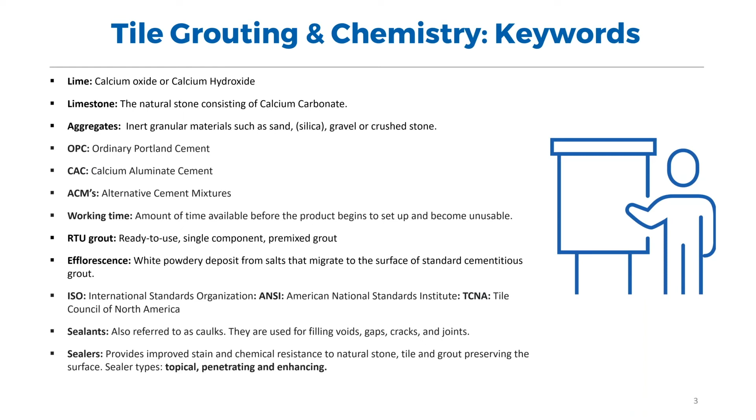So it's that degradation or decomposition of calcium carbonate that creates CaO, which is calcium oxide, and carbon dioxide. Not the best thing in the world there, but we'll talk more about that.

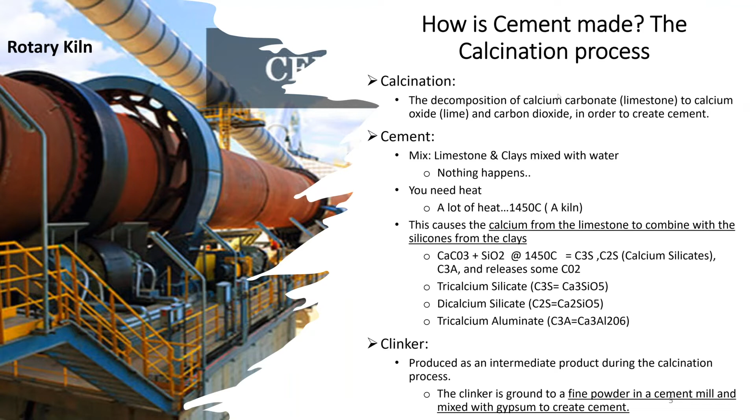The next screen shows you the 8 key raw materials in cement manufacturing. The key ones to discuss here are pretty much lime and silica. They're obviously the largest contributors from a percent composition, and we saw that in the clinker breakdown I gave you before. Alumina is also an important raw material in the formulation. We'll take a closer look at each one, but there's a total of 8 actual materials in there.

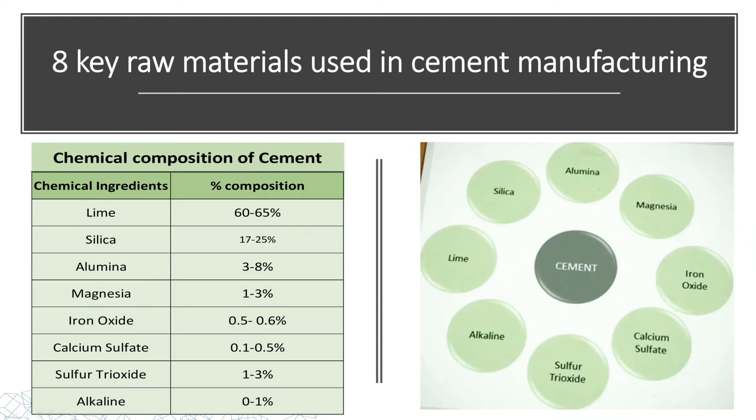Functions of some of these key raw materials, just sticking with the key ones here: lime is actually used in that formulation to form the silicates and aluminum calcium. It's very important to get the right quantity of lime. If you get too little, it reduces strength. If you get too much, it can compromise integrity. So there's an issue with getting just the right balance of lime into the kiln.

In part, strength comes from the silica. The alumina gives quick setting properties—when we talk about alternative cement mixtures with calcium aluminate, you'll see that alumina connection from a chemistry standpoint. Magnesia will reduce cement strength if added in excess, so we have to be careful about that. And the sulfates simply slow down or retard the set time.

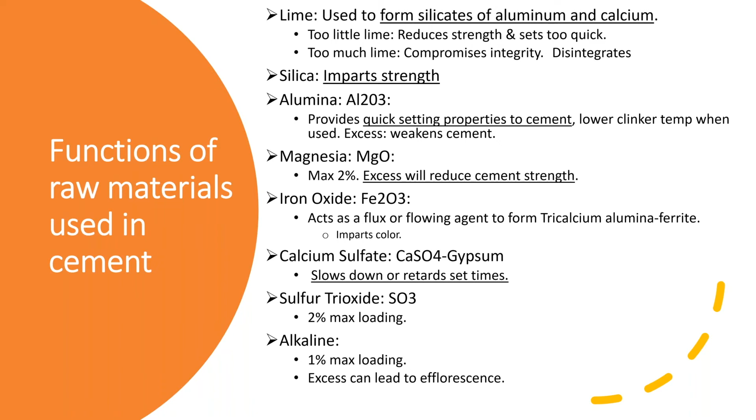If we compare OPCs to CACs, they're definitely a different class of cement. They're both in the powder cement category, but one's considered ordinary Portland cement and one's considered more of a high performance product, which is CAC. If you look at the bullet points pointing out the advantages of CAC, it starts with a far greater alumina content versus silica.

It has a much more compact molecular structure than OPC, so it's more tightly bonded, which improves water absorption—lowers it—and has significantly higher early strength development.

You'll see that if you've ever mixed a bag of our Ultracolor Plus FA—it actually imparts a heat of hydration, which is the next bullet down. The bucket actually gets hot as you work through the process because it's a reaction of heat of hydration causing that.

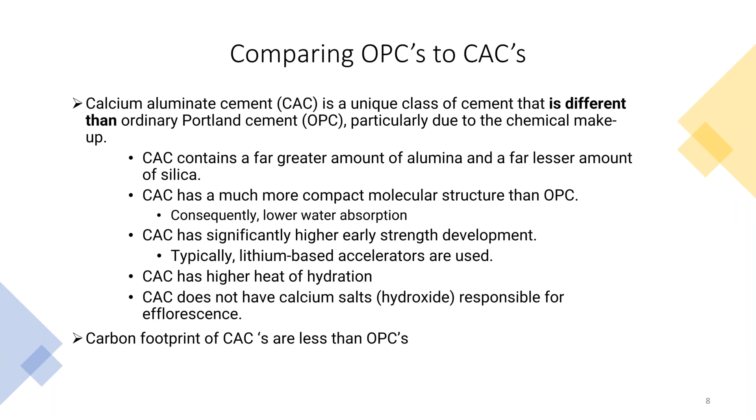It does not have any calcium salts, so no calcium or calcium hydroxide, which is the source of efflorescence. Another good point about CACs is that they have a lower or lesser carbon footprint than OPCs.

The chemical properties of OPC versus CAC: if you look at the columns here, you get silicates on the left and aluminates on the right in the table. Looking down the ordinary Portland cement column, you see high levels of calcium silicates, which are C3S and C2S, the first two rows. Then going down the aluminates, you see a much larger percentage of aluminum silicates in the formulation.

The graphic on the right shows a direct comparison of traditional Portland cement with the calcium hydroxide crystals, a microscopic look at it. Below that is our Ultracolor Plus, which again is a CAC chemistry, which has none of those calcium hydroxide crystals—so it's essentially efflorescence free.

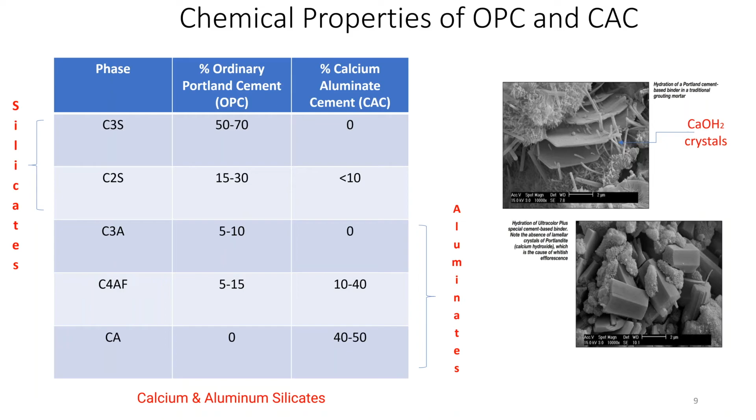The carbon footprint: I mentioned a minute ago that OPCs have a high level of contribution to CO2 as it gets processed in the kiln. And if you look at it on a pie chart basis, 8% of total CO2 emissions comes from concrete, or actually the manufacturing of cement. And that doesn't include the transportation of cement to a job site or to a plant for processing.

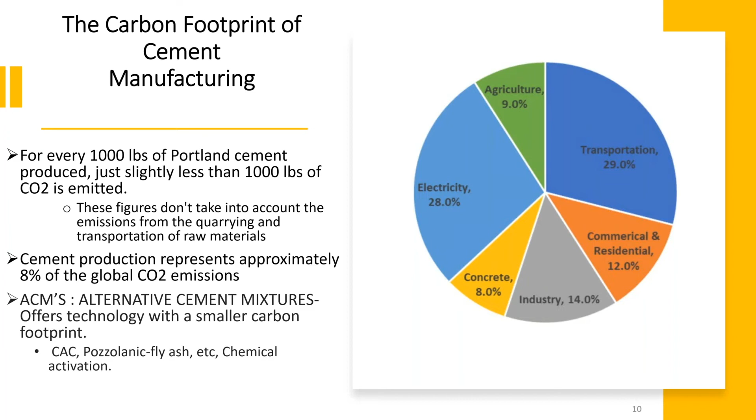Alternative cement mixtures, ACMs, have a smaller footprint, and I think that's the direction we'll see in the future: more use of that just for that reason alone, or even blends of CAC with OPC.

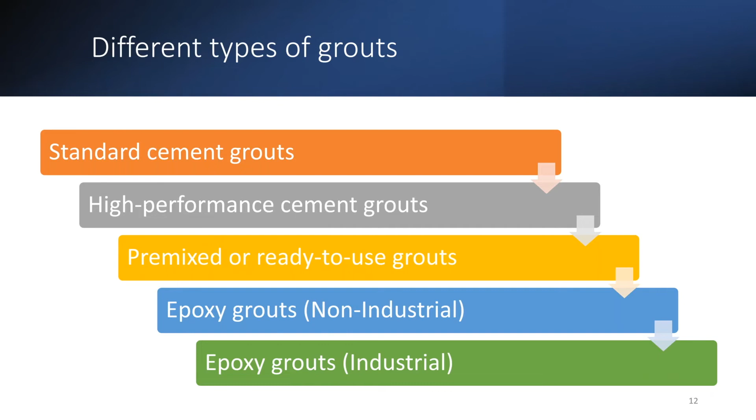Grout chemistry and performance attributes. There are 5 different categories we will discuss in some detail now, starting with standard cement grouts. That's your OPC grouts. The high performance cement grouts, that's your CAC grouts, your calcium aluminate grouts. The premix or ready to use grouts is another category we'll discuss. And then the final 2 will be the epoxy, non-industrial versus industrial grade, and where to use those.

Cement powder grout's basic chemical composition: it's either OPC or CAC as a binder. The fillers are calcium carbonate, limestone, clays, that type of filler. The aggregates are either a fine or coarse aggregate. It varies in particle size. Our FA grouts get a very fine aggregate in terms of particle size. Fumed silica is also a typical aggregate used in the formulation of cement powder grouts.

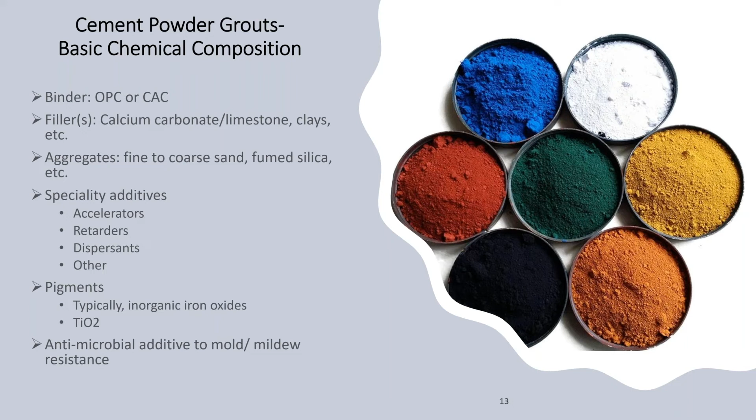And then there are all different specialty additives. These vary from manufacturer to manufacturer in how they utilize them, but they can be accelerators, retarders, dispersants, whatever the case may be. And as you see in the graphic to the right, that's the pigment range. Typically not so vibrant with grouts, but inorganic oxides are typically used along with TiO2 as the pigments. And there is always some antimicrobial used for mold and mildew resistance as part of the formulation.

So a closer look at Portland cements. We'll get into more detail about the ANSI specs later on, but it conforms with ANSI A118.6 as well as ISO 13007. The suffix on there is important because it represents different things ISO uses to define the grout category; I'll show you the details of that later on. Hydraulic cure is the mechanism for curing. So when the cementitious powder reacts with the mix water, it creates a hydraulic reaction within the matrix.

If you look at installation variables, Portland cement probably has more than any, because it's at the mercy of the temperature of the mix water and the temperature of the grout powder, which you want to keep at ambient conditions 24 hours before you use it. The working time can be compromised, especially in high heat and humidity installations. Not all grouting is done at room temperature. Product mixing is important. You have to make sure you mix it for the adequate amount of time.

In this case, you actually do a slake, which I didn't have on the list, but along with product mixing there's a slake time, which allows the hydraulic reaction to cure to a level before you do a final mix. The temperature of the wash water is also important. And then what happens if any of these are abused? Overwashing can lead to efflorescence, and overwashing can also lead to shading or mottling. That's during the cleaning process.

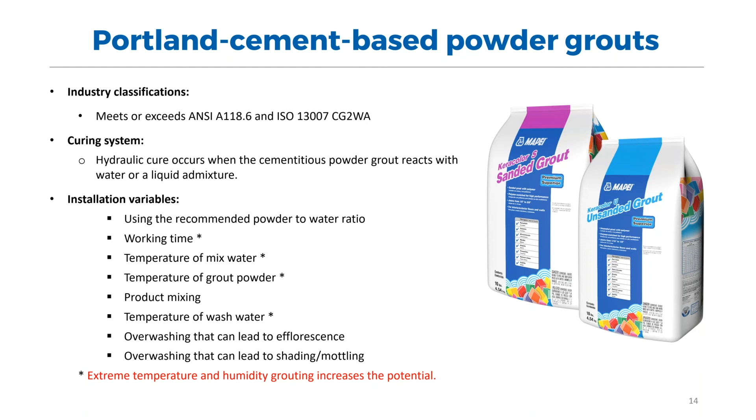High performance has a lot fewer installation variables than the previous product we looked at, the OPCs. It conforms with 118.7, which is a higher level specification by ANSI, and it has the CG2WAF suffix to the ISO spec, where F is for fast setting. The curing process is the same as the OPCs, but it typically has a rapid setting function, which is the F in the ISO spec. That allows for foot traffic in 3 to 4 hours, and it's traditionally referred to as efflorescence-free grout. A lot fewer installation variables, as you can see there.

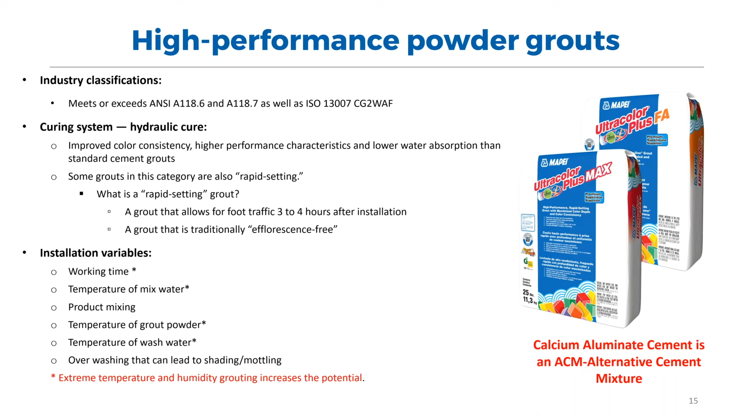It's good to compare the impact on market price. If you look at the column cost per unit, estimated market price, third from the right, and look down at a 1,000 square foot job site, you're looking at $27 versus $17 pricing differential between using an original Portland cement OPC versus a high performance. That's a little bit more than 3 cents per square foot. That's very doable, to get rid of a lot of headaches like efflorescence and improve stain resistance and color consistency. It's worth the expense.

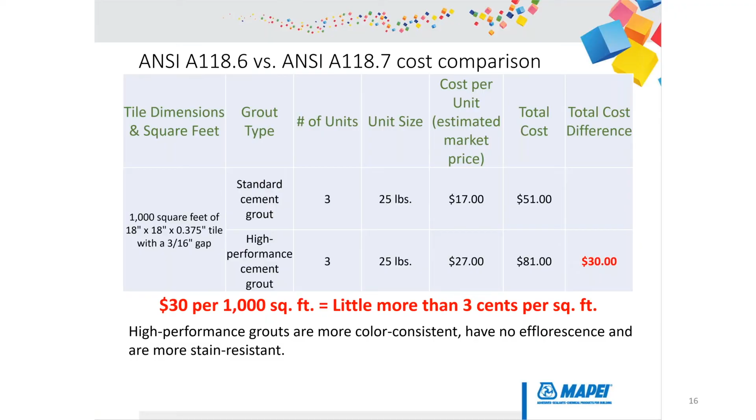Switching to RTU, ready to use grouts. They include a binder, a filler and an aggregate. The binder is typically one of 3 different types: an acrylic latex, a urethane, or a hybrid, which is typically a combination of latex and urethane.

But these are the typical binders used. It's a water-based product. It's not 100% solids, as you can see there with 75%. Fillers are typically calcium carbonate or limestone. And the aggregate, again, is from fine to coarse with possibly a fumed silica in there. Everything else is similar to what we see with the other grouts as well, in terms of the other attributes

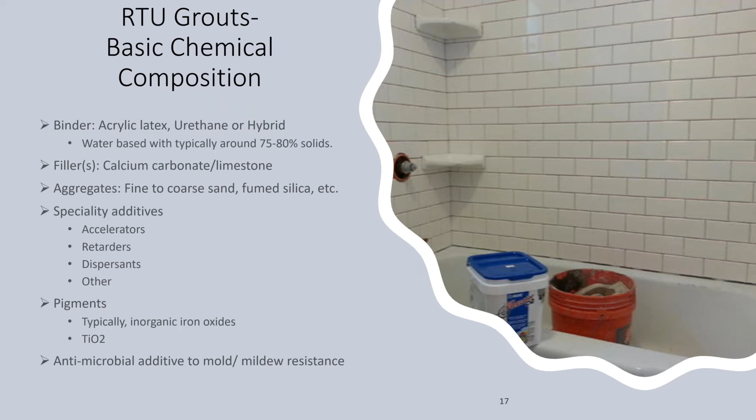or formula composition. Ready-to-use grouts don't officially have an industry standard right now. It doesn't have an ANSI standard. That's work in progress by a subcommittee of the TCNA group. So we hope to have that soon, but at this point in time, there's no official standard.

What some manufacturers of grouts have done is utilize the existing standards and actually test a ready-to-use grout, in our case, Flexcolor CQ, under the ANSI spec of 118.3 and ANSI spec of 118.6 on some tests, for instance, compressive and water absorption, and a few others that were able to achieve specification on that.

There has been a big evolution in the last, say, 5 years in the chemistry technology that's being used in RTU grouts. It's a much higher performance product now than it used to be. And we've seen that in our sales. It's very popular at this point.

The curing process is different than hydraulic. It's by dehydration. So as it loses its water, it actually cures out. Typically, you can have foot traffic in 24 hours. You won't want to expose it to intermittent water for 72 hours. But you look at the variables below, they're again a lot less than what we had before. We use a wash as you go approach to cleaning, not what we use with cementitious grouts or epoxy grouts, so it's quite different than either one of those two.

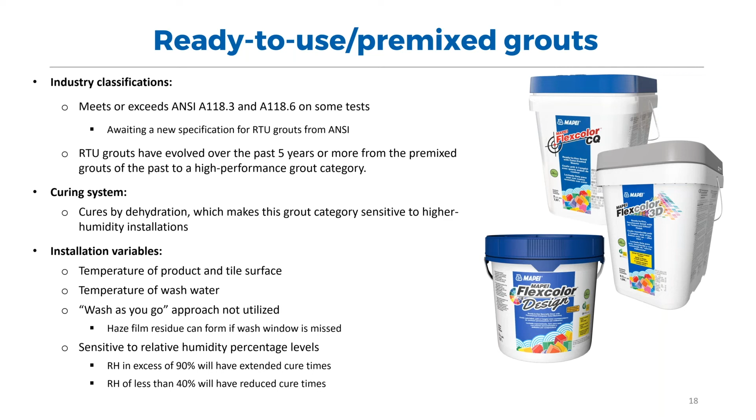Epoxy grouts are formulated with a resin and a hardener. The resin is typically a bisphenol or BPA epoxy resin. Epoxy grouts can be either water-based or 100% solids. 100% solids is what MAPEI epoxy grouts are formulated with. Not all of them on the market at all, but it guarantees a more robust epoxy grout when you have 100% solids. The hardener is an amine system or amine chemistry, so it's the part 2 of the epoxy resin mix. And the aggregate's usually separated out as a part 3, but not always. So it's either fine or coarse, just like the others.

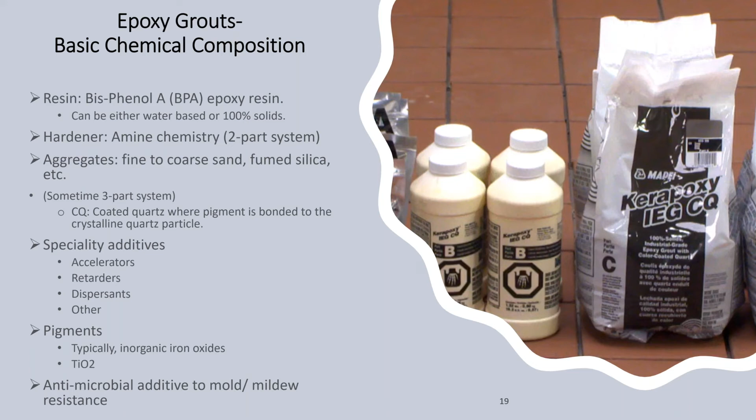In the case of a lot of epoxy manufacturers, and definitely with MAPEI, we use what's called a CQ technology, a coated quartz technology, where we bond the pigment actually to the crystalline quartz particle. And that improves a lot of things. It gives you no opportunity for bleed or for discoloration over time, because it's actually fused to the quartz particle. Specialty additives similar to what we've seen before. Same with pigments and antimicrobial.

What's the epoxy industry classification? It's 118.3. 118.5 also applies, and the RG is for reactive resin grout. The two grades are non-industrial and industrial. In the case of these graphics here, the Kerapoxy IEG CQ is our industrial grade. That's used in commercial kitchens, back of house restaurant applications, breweries, a number of different things.

Typically the situation with those installations where you need an industrial grade epoxy is when you have enzymatic no-rinse cleaners that the janitorial staff leave overnight on the surface, and that in combination with what's referred to as oleic or fatty acids. That combination of those two things together, which is quite common in breweries and commercial kitchens, etc., deteriorates normal non-industrial grade grout. So you need to have the industrial grade grout for that reason.

Epoxy grouts are impervious, less than 0.1% water absorption. The curing is a chemical reaction between the resin and the hardener. And there's very few installation variables. There are a few that you have to be careful of, because there is a tendency for epoxy grouts to have a lot of haze film. So we typically grout epoxy grouts with water as its friend, and use quite a lot of water during the washing process to ensure that we minimize the haze film residue.

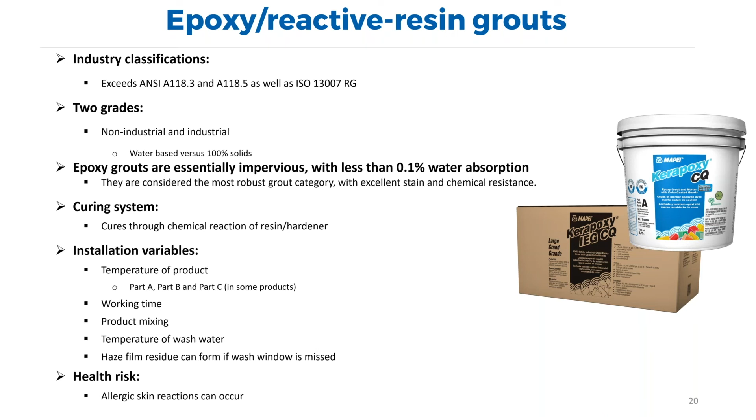There is a health risk to some people. The numbers I've seen on some studies is less than 2% of men and 1% of women. It's a very, very low percentage out of 100 that have an allergic reaction to epoxy, but it can happen. So that's something to be aware of.

What's the right grout for your tile installation? How do we go about that? What are some of the differences between the different grout categories? We'll look at that first to define that difference. There's several, but we'll talk specifically about the mixing step, the product application step in terms of when you're applying the grout, and then manufacturer to manufacturer variations.

So just looking at the mixing step first, if you look at cementitious grouts, you have the addition of water, where you don't do that with RTUs. It's ready to go. There's no water to be added. Water can become a variable if it's not weighed. So the mixing step's quite different between cementitious and RTU.

You get into epoxy grouts, and it's not water to be added, but it's making sure that you get all the components out of the part A and part B in the packaging, and possibly part C, and make sure they're homogeneously mixed before you start the grouting process. The product application is quite different too.

If you look at cement versus RTU and epoxy, the one that sticks out the most in terms of its difference is RTU. As I mentioned previously, it's a wash as you go approach, where we float probably 10 to 15 square foot. That's our recommendation. It depends on the installer and the conditions. But then come back and do a wash within 10 minutes or less of starting your floating process.

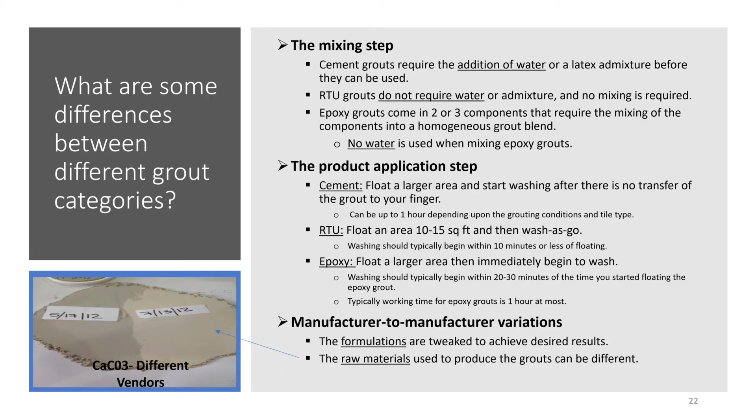Common mistakes made. The first and foremost is probably basing your grout selection on cost and not on need. That's a biggie, and we see that all the time. You really need to ask yourself about the installation environment before you purchase and match it up to that. For instance, is it a floor or a wall? Is it interior or exterior? You want to look at all those.

Is it going to be a dry, wet, or hot exterior installation area? Is it going to be submerged, or no water exposure, or possibly in a shower with intermittent water exposure on the floor? Stain and chemical resistance, is that important to you? You have to ask that question. And then care and maintenance costs.

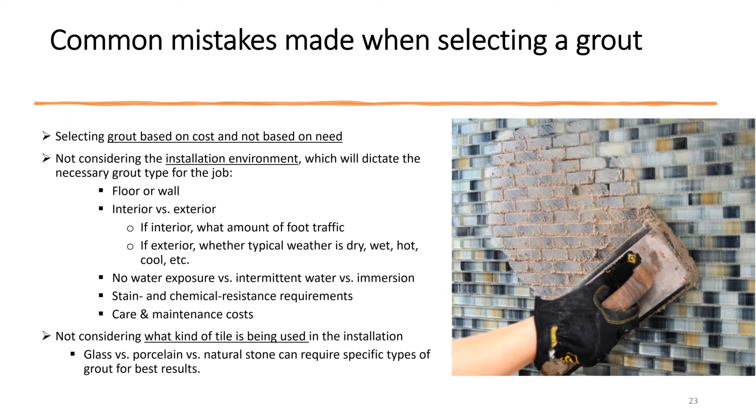Not considering what kind of tile is being used is also a common error. Glass and porcelain versus natural stone probably each have their niche grout that should be used in each of those applications or tile types.

Square foot difference on grouts is pretty interesting to look at. Again, if you compare row 3, which is at 70, versus row 1 of the grouts, which is the Portland cement sanded versus high performance cement, you get that $30 disparity per 1,000 square foot, or 3 cents per square foot. So it's not prohibitive to get that upgrade. You see the slight difference between sanded and unsanded, and these are typical retail prices. It's not fixed, but it's supposed to represent typical retail pricing.

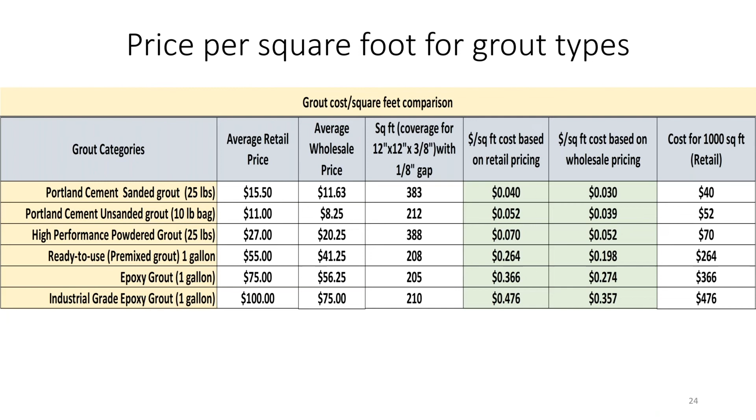As you move up the ladder, you get into the ready to use, and now you got your full chemical and stain resistance, as we talked about before, with the RTU grouts, as well as with the epoxies and non-industrial grades. So the pricing goes up and up exponentially depending on the grout you select.

So what are the variables out there? Not just in extreme grouting temperatures, but also at room temperature, you can have these same variables. The pictures are nice to look at - it gives you a visual of efflorescence with that white precipitate we defined earlier. Discolored, shaded, or mottled grout is by far the #1 complaint we get, for sure. You see graphically how that's displayed in the second graphic.

Soft or cracking grout can happen by underwatering or overwatering during either the mixing process for cementitious grouts or the cleaning process for any of those grouts. That's something that distorts the ratio of cement to water. If you play with that, it can cause issues with the W to C ratio, and can cause issues with performance properties. All those can compromise compressive strength, tensile, flexural, or bond strength.

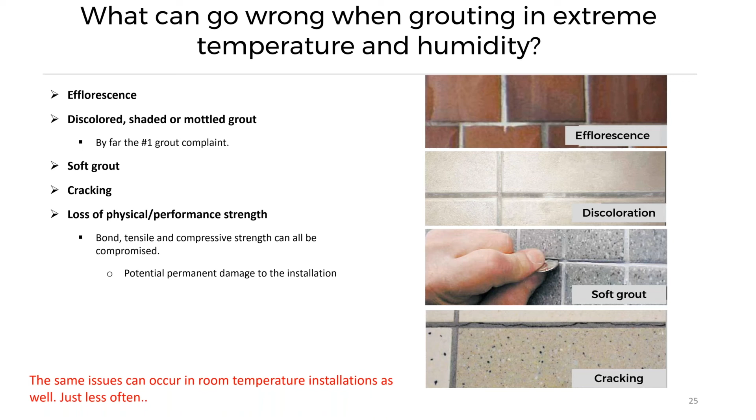There is a 15-degree rule out there if you do any hot weather grouting, or for the home builder market, which we deal with a lot. The traditional manufacturer recommended range of temperature for grouting is 50 to 95 F. For every 15 degrees above 70, epoxy - well cement grouts for sure, epoxy is a little bit less than that - but cement grouts lose at least 40 to 50% of the working time. A good example is the 85-degree bullet there: if your working time's 30 minutes at 85 degrees, that's going to go down to 15 minutes. You need to adjust your grouting accordingly because you can get that skin over quicker on the face of the tile, and you won't get transfer quite early with cementitious grouts to your finger.

The other extreme is true. If you go down in temperature, you have actually an increase in working time, or time for cure, I should say.

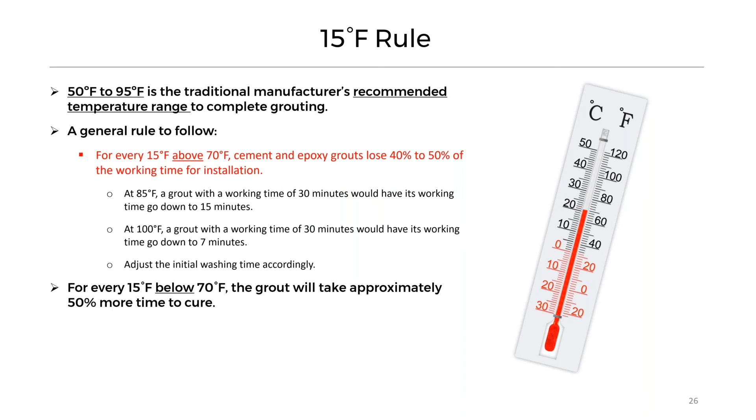Tile industry standards - we defined these acronyms earlier. The ANSI and ISO set the specs for grout. The first one, 118.3, the second one, 118.6, the third one, 118.7, are the 3 critical ones we use. You very rarely see 118.5 and 118.8, definitely not 118.8 that often anymore. 118.8 was a modified epoxy emulsion.

That was the industry's effort to take an OPC grout or cementitious grout and add an epoxy hardener to it to see if they could improve chemical resistance. It didn't go so well. It never was really accepted in the market. I haven't heard any good things about that chemistry at all.

Furan grouts under 118.5 are pretty obsolete too. That's based on a different chemistry than epoxies. It's similar, but it's based on what's called a high alcohol chain chemistry, and it uses an acidic compound for the cure for the hardener, not like a traditional epoxy. But it's still a two-part system.

So modified Portland cement, we talked about that - that's the different ones before. That's 118.6, and the ISO specs below are the suffixes we saw earlier. And again, I'll point out that the RTUs are not listed above because we're waiting for an industry specification on that product.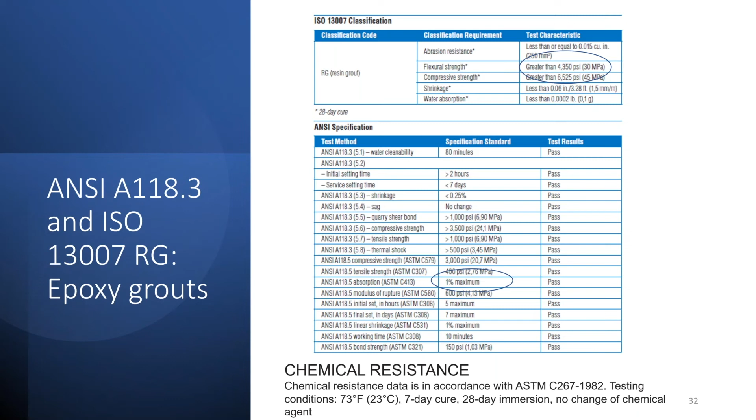It's obviously our most robust grout and our Cadillac in terms of price point as well. But you see the flexural and compressive strengths are extremely high. Personally, my favorite is probably the epoxies for a lot of different applications.

There's another classification system referred to as COM and RES, or environmental classifications. COM is for commercial installations and RES is for residential installations. This defines various job site conditions from COM 1 through COM 7, RES 1 through RES 7. Grout manufacturers market this and put it on our bags where we pass COM 1 through COM 5, or RES 1 through RES 5, or whatever the case may be, depending on the grout category. So it's another differentiator as to what grout's appropriate for your application.

This environmental classification system was first introduced in 2012 or 2013. So it's been out for about 8 years or so. It's grown in the last couple of years. COM 7 was added, I think, in 2018 or 2019, which is the immersion status. Look for this on the grouts as you purchase, because it's a great tool for picking the right grout for the application or installation type.

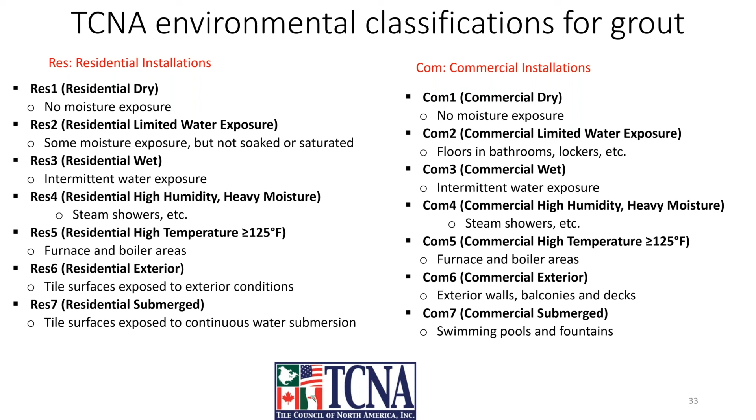Caulks and sealants. So switching gears, MAPEI's two product offerings are siliconized acrylic and, of course, 100% solids, 100% silicone sealant. So we have our two products that we offer there. The different chemistries out there relate to the glue or emulsion polymer used to make caulks.

The vinyl acrylic was the first generation. It's almost a painter's caulk, a latex caulk you hear about. It's very basic, just for filling nail holes or whatever. It's not a high-end caulk. The second one, 100% acrylic, is pretty much the siliconized acrylic caulk I mentioned before. That's that technology, so it's a higher version of the traditional latex acrylic.

There's also urethane and silicone. Some people use a urethane. We don't offer that, at least in my group; different departments we have at different business units might. We offer a urethane sealant, but we stay with two chemistries in terms of tile and stone: silicone, 100% silicone, and siliconized acrylic. Hybrid chemistry is something MAPEI is pursuing now a little bit, referred to as MS polymer or modified silicone. It's a next generation version of silicone that's actually paintable, so it has that advantage.

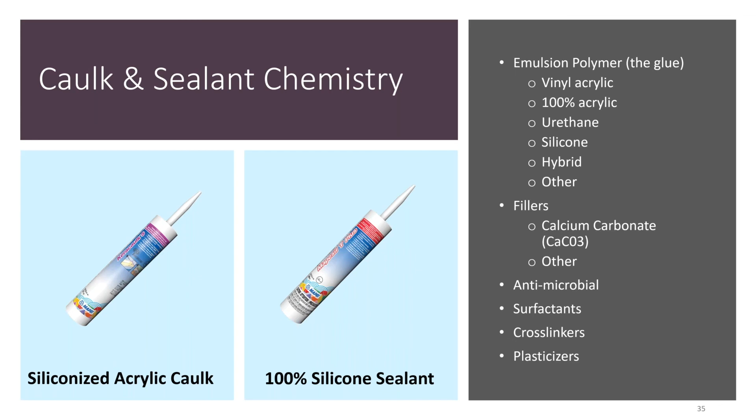Fillers: calcium carbonate is typically the standard filler with caulks, and then, of course, they have the things we saw before—pigments, antimicrobials, surfactants, cross-linkers—and in some cases, but not all cases, plasticizers.

Our siliconized acrylic is in the graphic there. It's a caulk product. The interesting thing about comparing siliconized acrylic to 100% silicone is how it cures. What you see here is our siliconized acrylic caulk, and it dries as the water evaporates. So actually, if you put a fan in the room, you'd be better off. But in the case of silicone, it needs moisture to dry and cure, so if you want to enhance cure, put a humidifier in the room. This is referred to as room temperature vulcanization with silicones, or RTV.

In the case of siliconized acrylic, it can be painted, where silicone cannot. That's important to note, and it's one of the things you make a decision on. In the case of MAPEI, for every grout color we have a caulk, and that's a complementary product to our grouts—that's why we offer it. So you don't really need to paint in that respect.

Acrylic caulks are water-based, so they're not fully waterproof for that reason alone. So we definitely don't recommend them probably in a shower install or a sink surround or whatever. Not the best choice for exteriors. Obviously, they crack and shrink as well.

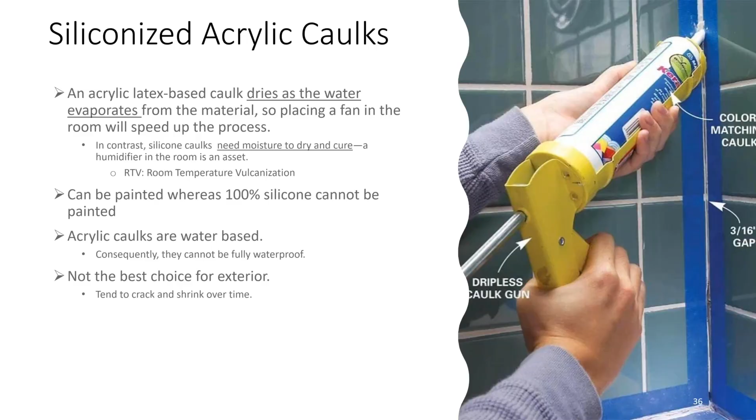It dries to a rubbery texture, and the joint movement can range from plus or minus 15 all the way to plus or minus 50. We use plus or minus 25, but in some applications, like in the California market, plus or minus 50 is mandated because of the earthquake zone that exists there. Greater flexibility and elongation is typical with this rubbery texture, so you see that with testing at 410%.

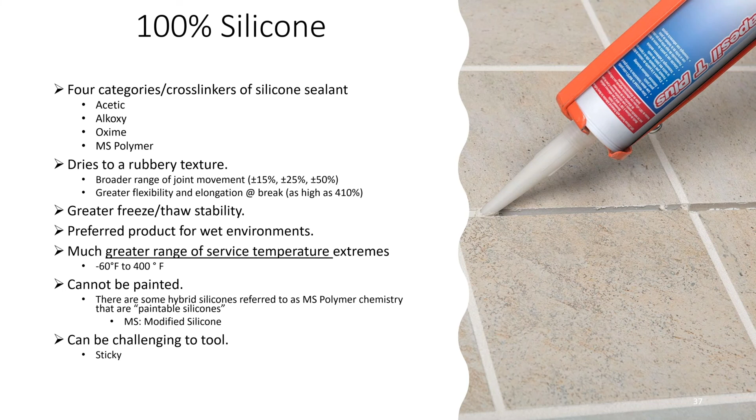It's freeze-thaw stable, and it's the preferred product for wet environments, as I just mentioned. The service temperature range is really large there: minus 60 F to 400 F. So the service temperature tolerance is very impressive with this versus a siliconized acrylic. It cannot be painted though, and it is somewhat difficult to tool at times, depending on your technique.

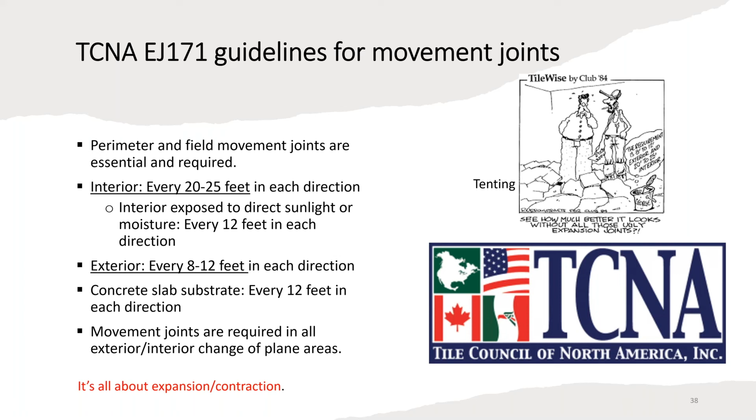They set that tile without an expansion joint and they got tenting, and that's what they're showing in that graphic. There are set distances that require an expansion joint between the grout joints to compensate for expansion and contraction. For interior, it's 20 to 25 feet. If it's interior with direct sunlight, that drops to half of that. Exterior is 8 to 12 feet in each direction. Movement joints are required for both interior and exterior change of planes as well. That's the EJ 171 spec.

In the case of grouts, or the tile caulk as we like to call it in retail, there are really just two types that cover the gamut of what we need in a flooring type installation. That's either siliconized acrylic latex or 100% silicone, and that's what we offer.

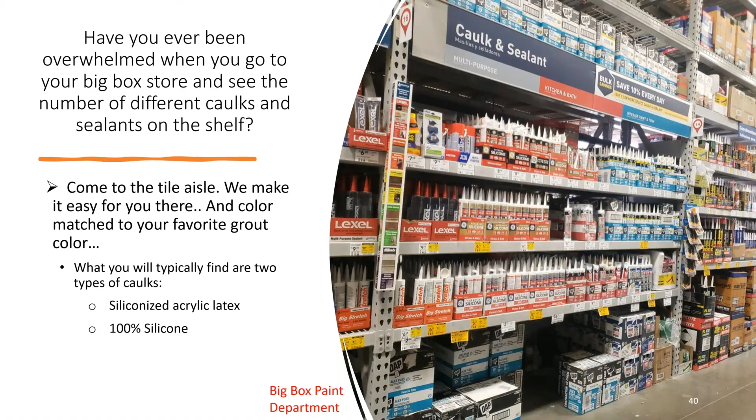How do you select the right grout for the job? You want to make sure you have the right tool to do the job. So what are some key questions? What's the temperature range requirement? I showed you before how silicone's got a broad service temperature range. And is there a waterproof requirement? You definitely want to go with a silicone if there's a waterproof requirement, not latex.

Will the caulk need to be painted? Well, we can't paint silicone, but you would look at a siliconized acrylic, or you would go to an MS polymer type of formula, or urethane, that's another option. What level of reliability is required? You're concerned about the longevity over time. Some 100% silicone sealants can go up to 20 years after installation before deterioration.

Shrinkage and cracking is important. So looking down the list, you've got the traditional window panes, which we suggest urethane for. Roofing is more of an elastomeric or rubberized product for filling gaps. Interior trim was one I mentioned before, like the painter's caulk for filling nail holes and that type of thing. For kitchen and bath, we definitely recommend a silicone. And of course, for expansion joints and perimeter joints, based on EJ171, it requires a silicone with a traffic grade rating of 25 Shore A or harder at 24 hours.

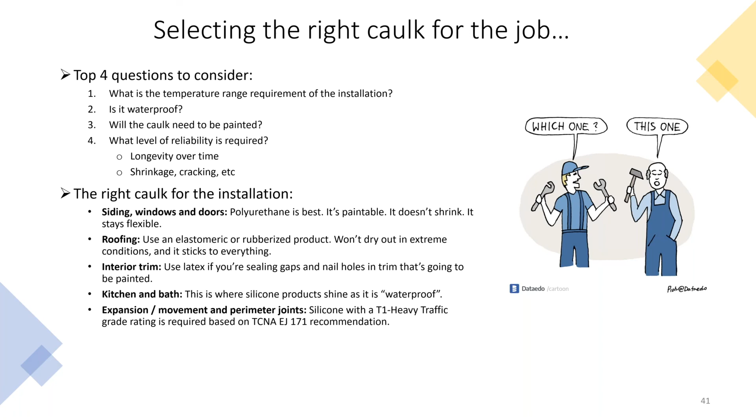Tile and stone care and maintenance solutions. Typically manufacturers offer four different categories, and that's what we do on our line: sealers, finishes, cleaners, and problem solvers. These are for the natural stone, tile, and grout that's used.

Natural stone probably gets the most play, definitely with sealers, because it's very important to seal some of the natural stones on the market. When you're talking about the softer marbles and limestones, which are more sensitive or porous and exposed versus a quartz countertop, which in some cases wouldn't even require a sealer, it depends on the manufacturer's recommendations. But sealers start with topical, penetrating, and enhancing. Those are the three categories.

In our case, we have both aqueous, or water-based, and solvent-based penetrating sealers in our line. And then there are five chemistries to consider, and they all have basic differentiation you'll see on the next slide, between these chemistries is their molecule size. The smaller molecule, in the case of the fluoropolymer, is called a nano molecule.

These are appropriate for dense stone, where you want to seal it, even porcelain in some cases, but definitely the denser natural stones you want to go with a fluoropolymer type chemistry, and possibly a solvent base, which would be more appropriate for a dense stone. Options include water-based, oil-based, or in some cases water and oil stain resistant. The fluoropolymer chemistry is water and oil resistant, and that's sort of the newer trending technology right now from a chemistry standpoint.

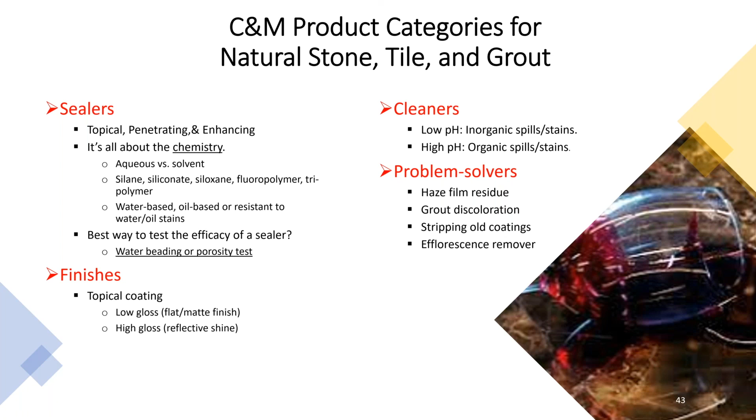Real quickly, the chemistry of stones and tile, just breaking down the 6 different categories. As I mentioned before, it's really all about the molecule size. The silicates have a very small molecule - that's the potassium, lithium, or sodium silicates. It was first generation chemistry, in my opinion, though it's still out there to a certain degree. Silanes, again first generation, but has a small molecule.

Siliconates - we definitely utilize this chemistry, as well as the siloxanes, in our Ultra Care line. It depends on the application and where we would promote one or the other. We don't refer to them as siliconates or as fluorocarbons or any of those categories - we simply call them what they are. For a certain application, like water-based, we refer to it as a 10 plus sealer. We don't really call out the chemistry. In some cases you can pick that up in the SDS, chemical composition, section 3 of the SDS, but we don't typically promote that. There's some exceptions because fluoropolymers are getting so popular now, we definitely try to promote or market that - it's oil and water resistant, so it has a lot of advantages as well.

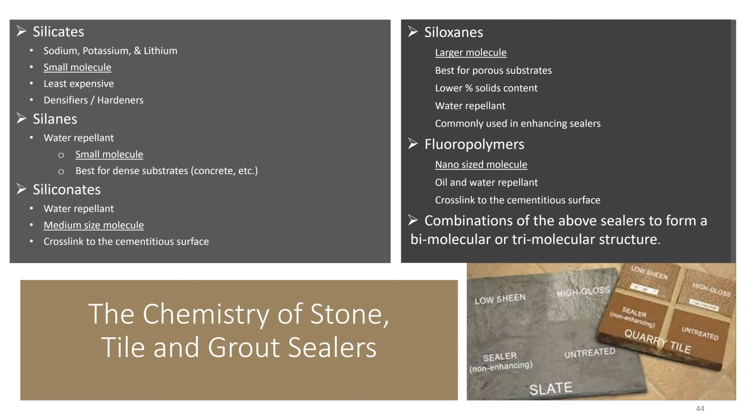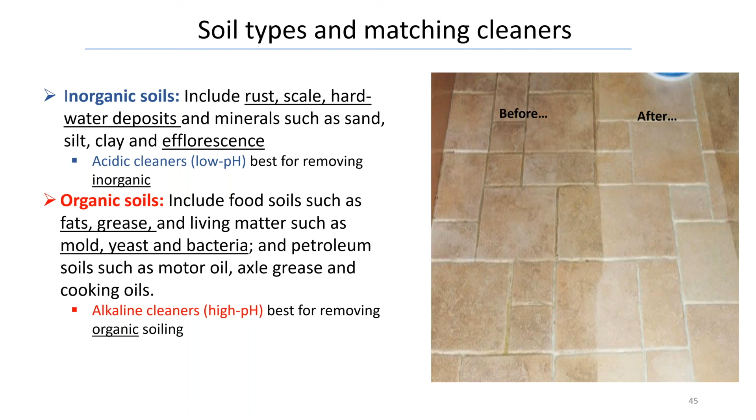The way we break up soiling is whether it's inorganic soils or organic soils, and you see in the picture how much of a difference a cleaner can make. The traditional inorganic soils are rust, lime, hard water deposits in a bath or shower, and efflorescence, which we all know occurs with grouting - so we have our efflorescence cleaner as a problem solver. These are all addressed with an acidic type of cleaner, a very low pH, typically below 2 or 3 on the pH scale. If you have more of an organic stain, like fats, greases, mold, or bacteria, you're looking at using a high pH cleaner, typically above 10 on the pH scale, to remove organic staining or soils.

Pay attention to the pH scale, it's important. What happens most is with natural stones that are porous or sensitive - marble and limestone are great examples. You take a lemon juice or vinegar at 2 pH, and you're looking at acid etching, and penetrating sealers won't save you from that. It will literally etch it if left to dwell for a period of time. So that's a big issue. I just saw an ad the other day on an infomercial where vinegar, typically sold around 5% concentration, was being advertised as a 30% vinegar product for household cleaning.

So think about that in terms of acid etching on a marble or limestone countertop. High pH household bleaches and ammonia are commonly used DIY cleaning approaches for stains. You've got to be careful about using that stuff directly without dilution, or use a dedicated care and maintenance type cleaner, which is not at the mercy of these household products. You can see the range of pHs on some common stuff there, with coffee and soda.

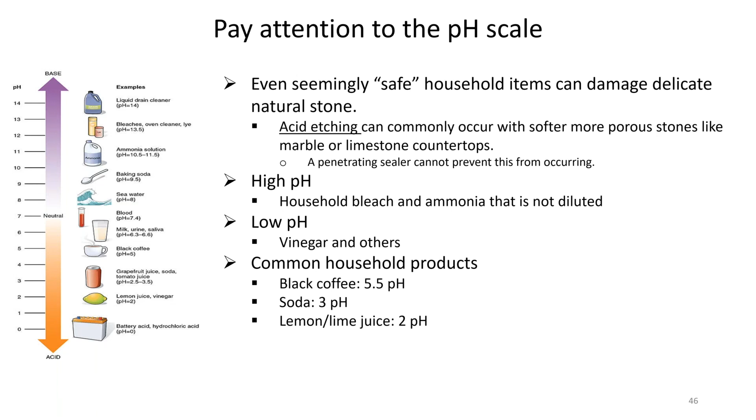So let's review, going through it again: tile grouts serve both an aesthetic as well as a practical function - we talked about all those in terms of how it's used. Caulks and sealants fill and seal gaps, but just as important, they're used for movement joints and perimeter joints in tile installations. Care and maintenance products actually preserve the longevity of your tile and stone installation - that's obviously very important given the investment we have in flooring.

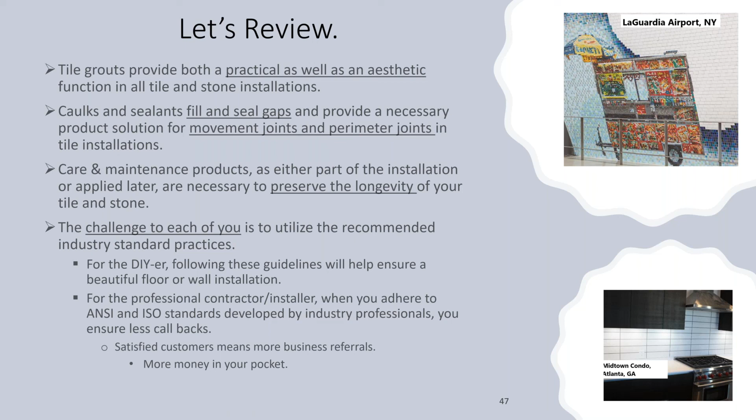So just a shout out, our challenge to each of you: on the DIYer level, whoever's listening here, I would definitely challenge you to follow these guidelines and ensure that your product was installed properly, so you'll have an end result to your expectations. For the professional, they're already following ANSI ISO specs and standards, which leads to more satisfied customers, better referrals, and more money in your pocket. In today's market with inflation, it'd be nice for all of us to have more money in our pocket. But that's the overview - appreciate your time.